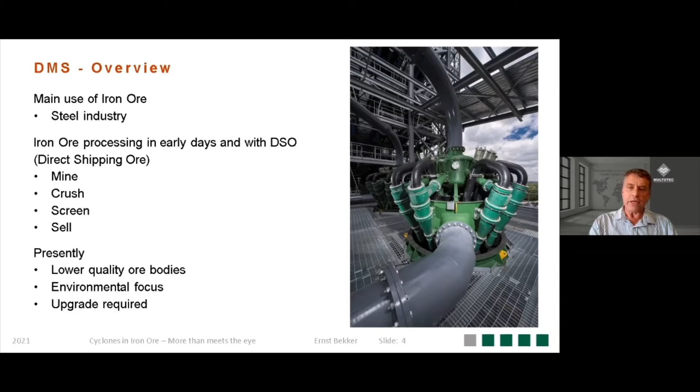So the reason for the processing is to provide obviously a higher Fe content in the feedstock to the steel mills and reduce the impurities like silica, alumina, sulfur and phosphorus. That also results in the reduction in carbon footprint and the emissions, and there's a very strong focus these days coming to the foreground on this specific topic of reducing the carbon footprint.

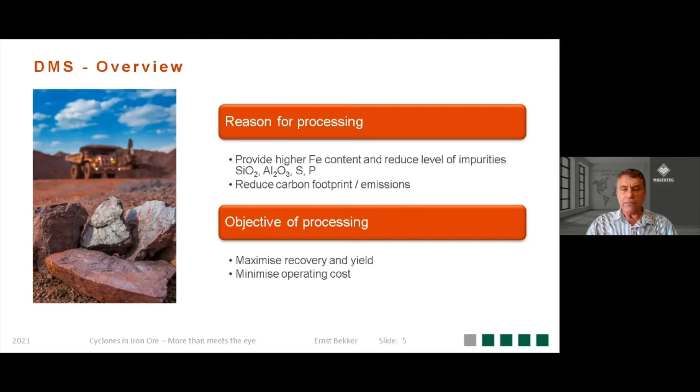So processing of iron ore is seen to become more and more relevant in the near future. The objective of the processing: maximize recovery and yield, like in any process, and minimize then the operating cost.

In this example, I divided it mainly into a DMS and a hydrocyclone environment, but hematite and magnetite are the two predominant ore bodies that is being focused on over the world. With hematite, coarse and medium sections are normally treated via dense media separation or jigging. So hematite is your dense media separation activity, magnetite the milling and classification activity.

The fines and the slimes on the hematite are normally treated via spirals, teeter bed separators, wet high intensity magnetic separators, flotation. And then on magnetite milling, hydrocyclones, low intensity magnetic separators and flotation. So I'll look at the hematite environment and the magnetite environment in this presentation.

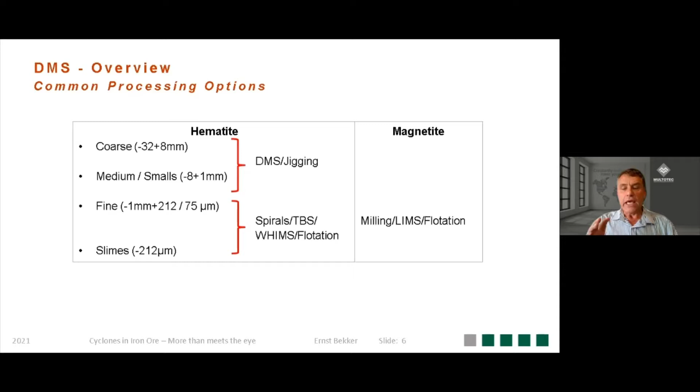So for those who may not be familiar with dense media separation, what is it? When you start looking at the ore body, there's some properties that you need to determine and see which one can be exploited most economically. And with hematite, density is the property that can be exploited.

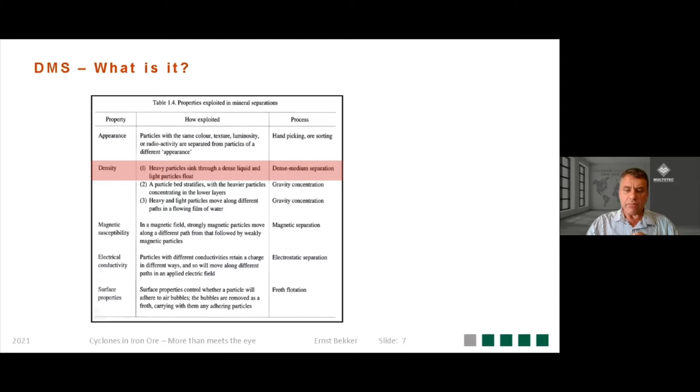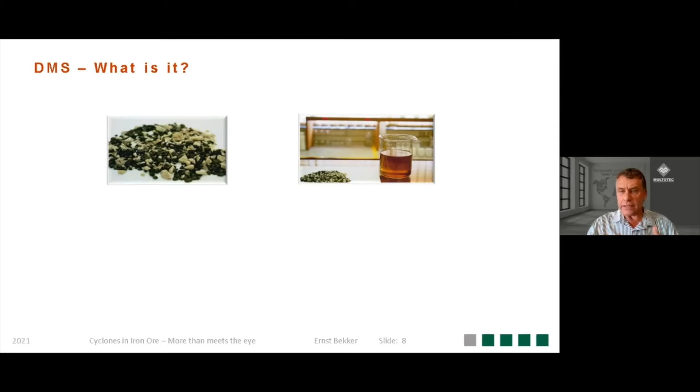So when you've got a mixture of ore coming from underground, it consists of valuables and non-valuables. And you need to separate those valuables from non-valuables. And one way of doing that is to introduce it into a liquid that's got intermediate density between the floats and the sinks. Introduce it into the liquid and leave it over time, and you get then a separation where the light material will float and the heavy material will sink. And this liquid density can then obviously be altered to decide how much of the material needs to float and how much needs to sink.

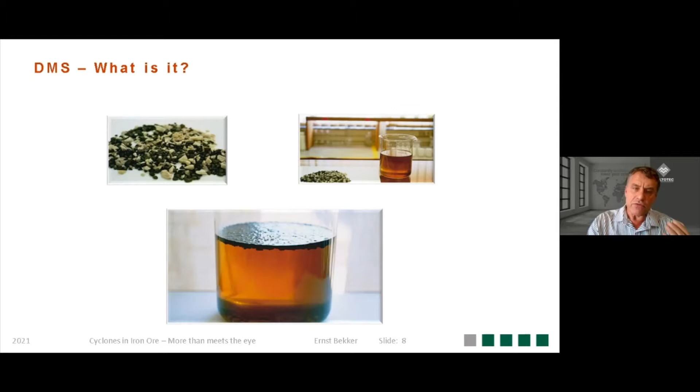But the picture just shown to you is that's on a laboratory scale. When you go into industrial scale, the plant is a bit more complicated. So you've got your feed preparation section, you've got your separation section, and then your media reticulation system.

And that media reticulation system is important because that liquid that was shown in the previous slide in actual operations is ferrosilicon, and it's very expensive and you cannot really afford to lose that. So you must recover it as efficiently as possible.

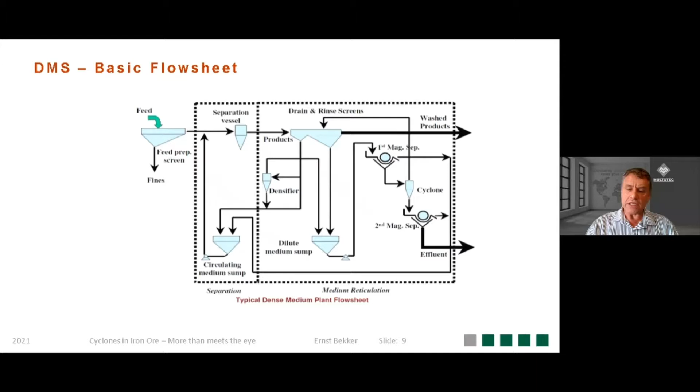So when we start with dense media, looking at the dense media separation, we start off with cyclone selection. This cyclone selection, and in this presentation, this will be the only slide on cyclone selection. We do training sessions where we go into more detail, but this would be summarizing it.

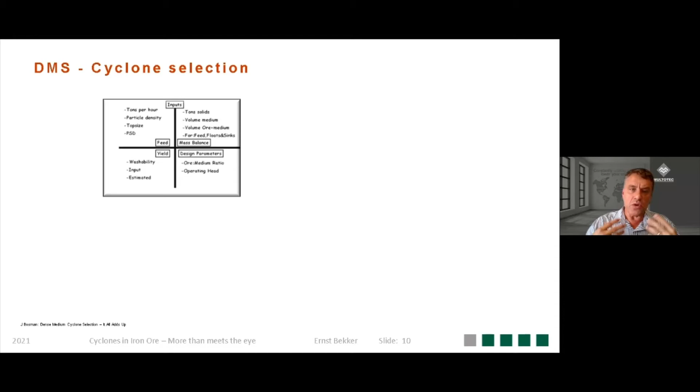You've got your input values. You've got your process values that you need to process. You look at the yield from the ore body. Look at the mass balance and design parameters. You also need to focus on the constraints: top size, breakaway size, number of cyclones, the spigot requirement.

You then decide on what cyclone diameter to select, looking at the cyclone capacity, the spigot capacity, and finally do your selection, looking at the material of construction. We do have a range of material constructions, and you need to then adjust to the circumstances or to the requirement and decide what is going to be the best selection for the client. This is, in a nutshell, what dense media cyclone selection entails.

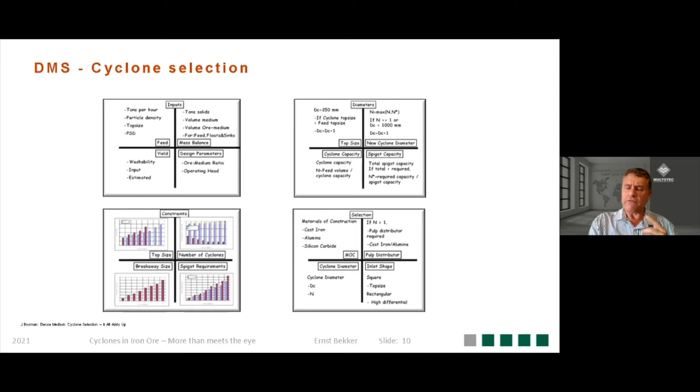But if you've done your job correctly, if there's enough information, if the information was accurate, then nothing should really go wrong. The unit should perform adequately. However, sometimes there are other activities or other factors just to keep in consideration.

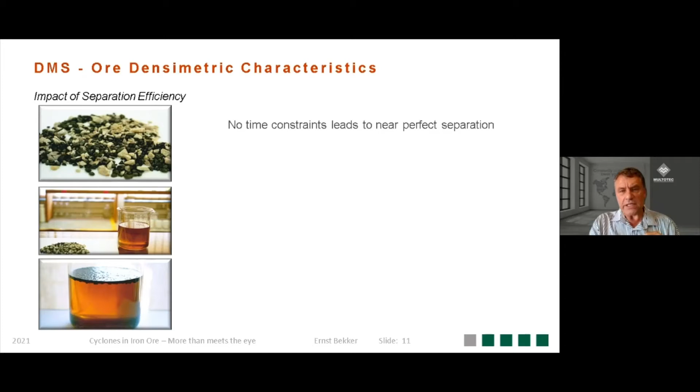The example on the laboratory scale, where you introduce the material into the liquid, indicated, if you look at the bottom picture, a very clean separation. But the reason it's a clean separation is because there's no time constraints, and it leads to near perfect separation. So in this graph, you've got on the x-axis the densities, and on the y-axis the fractional percentage of material.

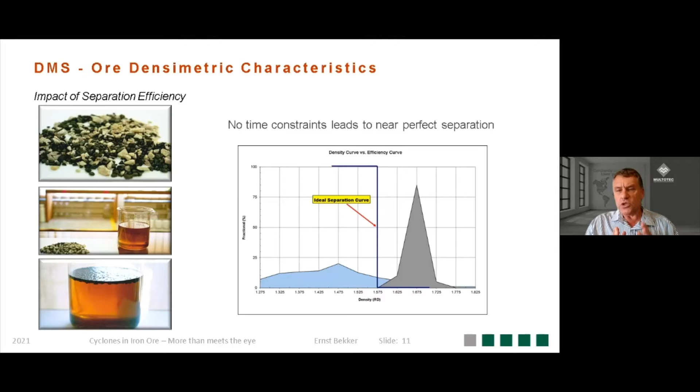And the blue line indicates the perfect separation. So with enough time, you can separate in between two types, splitting between a light fraction and a heavy fraction at a given density.

But when you process material through a dense media cyclone, then you've got time constraints, and there are other factors as well that can reduce the separation efficiency, and I'll touch on that a bit later.

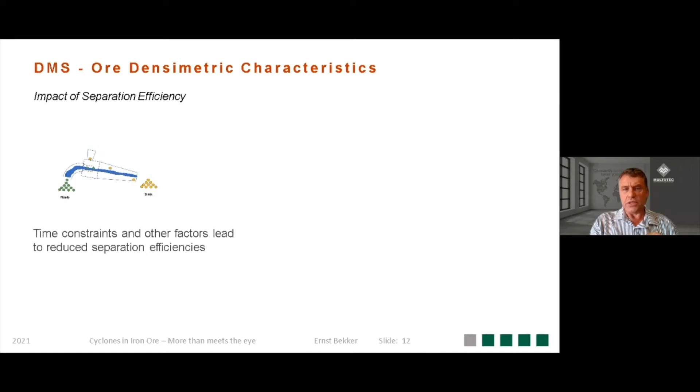Because of these constraints, you don't have a vertical separation line anymore. The lines slope, and because of that slope, you now start to get areas depicted in green and yellow, where material has got the probability of being misplaced. So it's not separated at optimum efficiency. As we reduce the efficiency of separation and operation, these shaded areas increase, and more material has now got the probability of being misplaced.

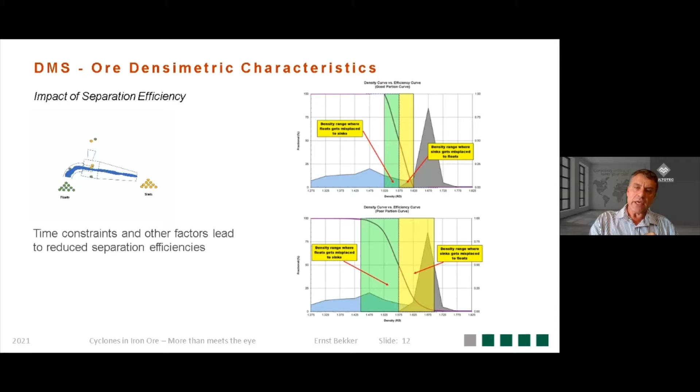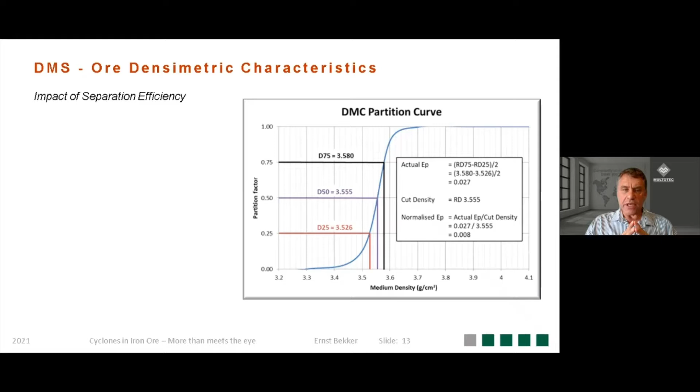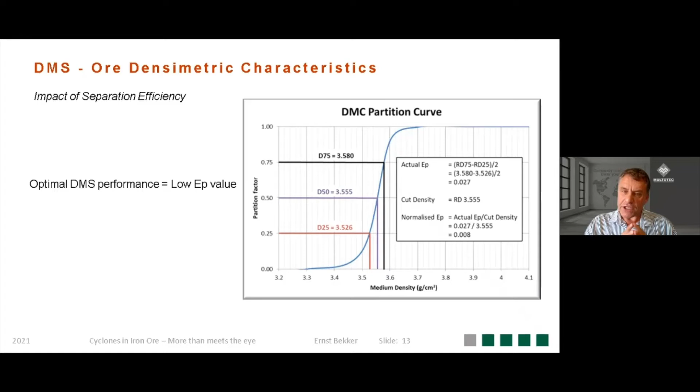So the partition curve gives an indication of how efficient your separation is. The partition factor, if you battle to understand it, is like a probability factor - what is the probability of a material of a certain density reporting to the sinks fraction in this example? The efficiency of separation is determined via the actual EP value, calculated at the top right-hand side, and that is the slope. The smaller the EP value, the more efficient the separation. So optimal DMS performance is associated with a low EP value, indicating good separation efficiency. We see that in the handbooks as well.

So what is the impact of separation efficiency on an ore body? This is an example where a client asked me to evaluate 2 different types of ore bodies. It's the same mining company, but it had 2 distinct characteristics - one with a low near density characteristic, and the other a high near density characteristic.

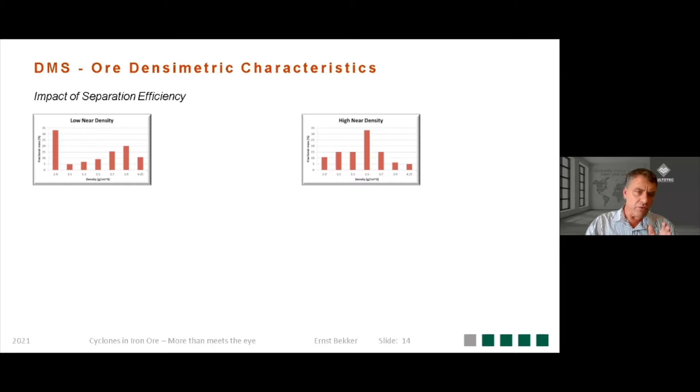Now, near density material is the amount of material present around the cut density of the cyclone. So if the cyclone is cutting at a density of 3.5, all the material between 3.4 and 3.6 would be classified as near density material. Low near density material is normally an easy separation process. High near density material is a more difficult separation process.

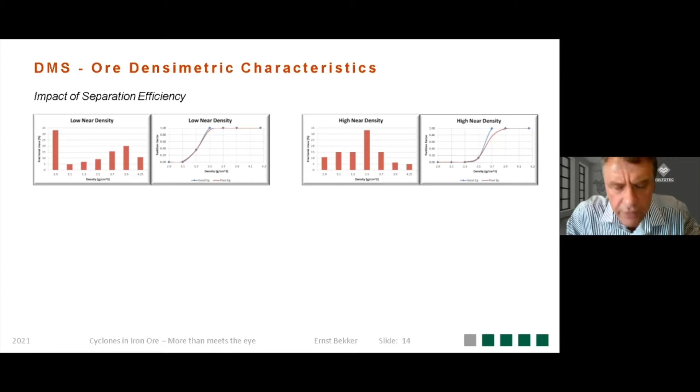So the client asked that I evaluate 2 different efficiencies on this material. The blue line is the good EP value, the red line is the poorer EP value. On the right-hand graph, the reason the red line moves further to the right-hand side is, in this example, the product quality of 65% iron was maintained.

Superimposing the 2 graphs on top of each other, you can see that with the poor efficiency of separation on the low near density material, that's about the amount of material that can get exposed to possible misplacement or poor separation. On the high near density material, there's much more material that can get misplaced or separated less efficiently.

Compare that when you had a good separation value on both examples. You can see in the high near density environment, if you had good separation efficiency, the impact would have been quite significant in reducing the amount of material with the probability of being misplaced. This points to a specific situation: if you are processing material that is easy to separate, over time you can get away with a poorer separation efficiency. But if you maintain that type of operation when treating more difficult to separate material, you're going to have a substantial impact on your bottom line.

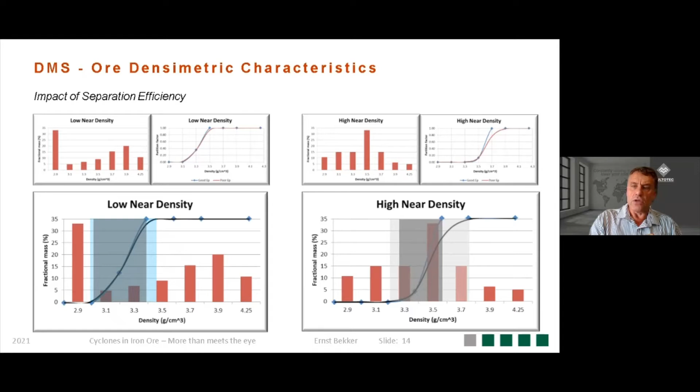So the evaluation went further with this client - the low near and high near density scenarios, looking at a low EP and a high EP value. Just a point, this high EP value of 0.067, these are not theoretical values.

I will show you later in the presentation how easy it is to get to these values, and often exceed them as well. Treating 1,000 tons an hour at 65% Fe was the aim.

You will see that the yields are different because it's different ore bodies, but the difference between treating low near density material versus high near density material, and the difference in poor and good separation efficiency, can be seen on the last line. On low near density ore bodies, poor separation does have an economic impact, but not as significant as with high near density environments.

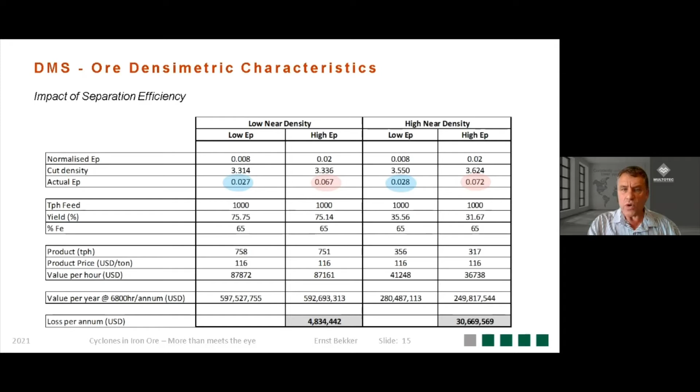So there's one area which can become a problem, even though the cyclone has been selected correctly. Coming back to this graph, the comment was made that optimal DMS performance is associated with a low EP value. That's what the handbook says, and everyone agrees with that. That is true. What is not always clear is that you also need to be at the correct cut density. Cut density is this 50% point on the curve, the density where a particle has a probability of 50% of going either to overflow or underflow. That's what we refer to as the cut density.

So some viewers will probably tell me, how is that possible? Because you've got a SCADA system and a process density control system built into the system. So how on earth would you not operate at the correct cut density?

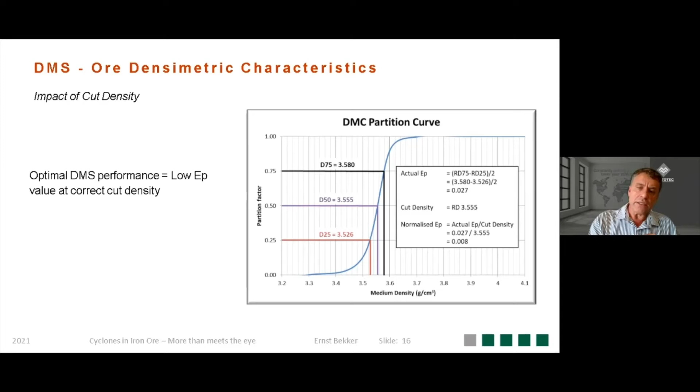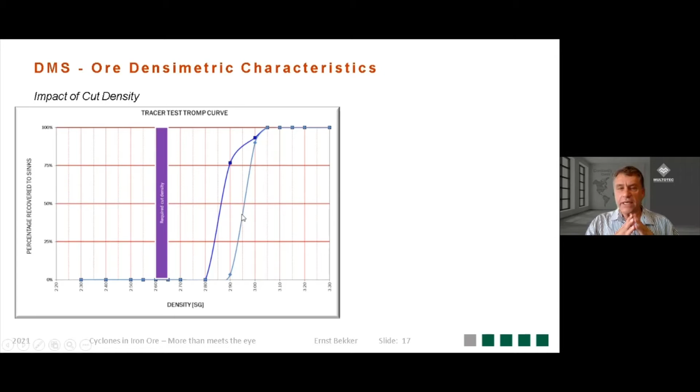Here's an example of a different plant. The shaded area is where the SCADA set point is, and the two other lines are where the tracer tests indicated the cut densities actually were.

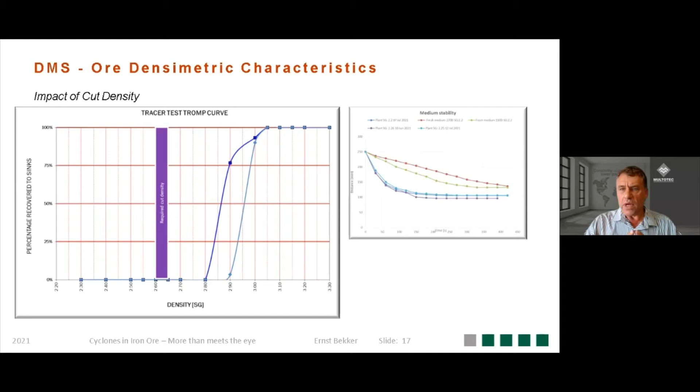The problem here, and the client did a thorough investigation, is the media characteristics. This is a settling test, just over time. The red and green lines are new ferrosilicon, and then the media that's in process shows a different settling rate. So the media is unstable. Now the question is, where do you need to go and look for the problem? But that is how a cut density can change.

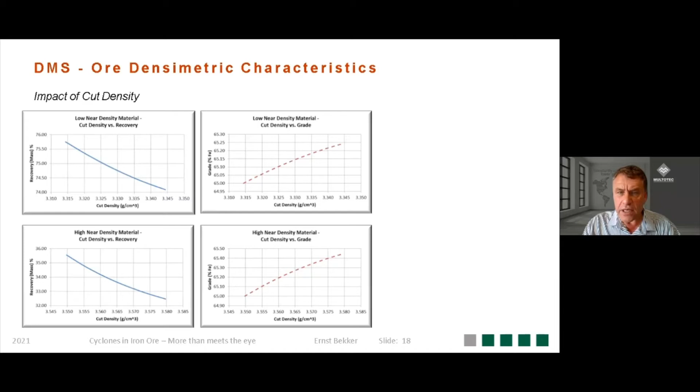On the low and high near density environments, the yield dropped about just over 2% on the low near density environment, and about 3% on the high near density environment. That is the change in quality. On the low near density environment, a 0.25% iron content change, and on the high near density environment, a 0.4% change. On the economic side, the impact on your low near density material is about 13 million US dollars, and on the high near density material about 25 million.

So if you speak to clients, they might say, hang on, why is this a big deal? Because if the product quality is changing, we will be aware of that, and we will take counter action to make sure we counter for this deviation.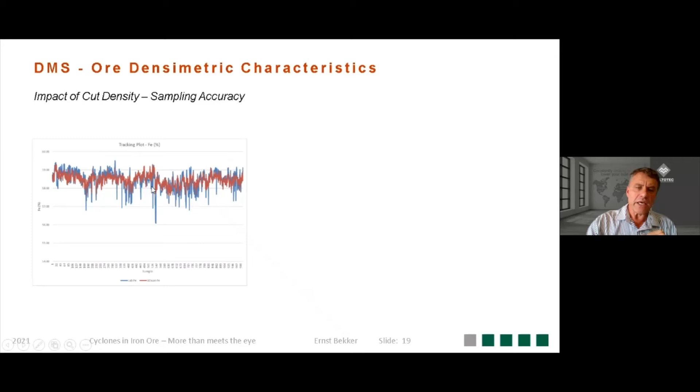This is a comparison between a laboratory and an online analyzer. I was looking for different data to illustrate the point, but the factor to keep in mind with sampling is variance, Willem alluded to that as well. To use this as an example, the same sample was analyzed by two different methods, and look at the difference in quality results being reported. The purpose of showing this slide is not to compare these two methods. What I want to illustrate is that there's a variance in the results you are measuring.

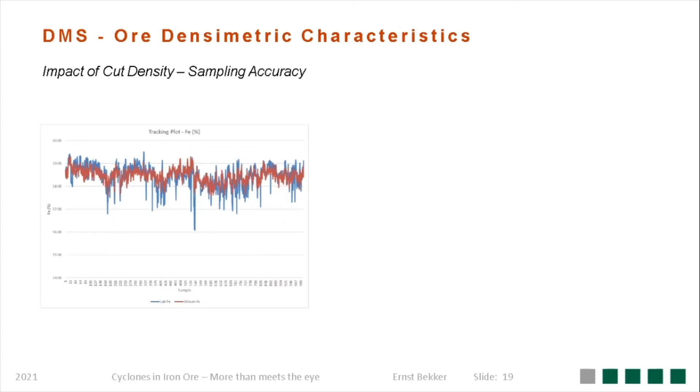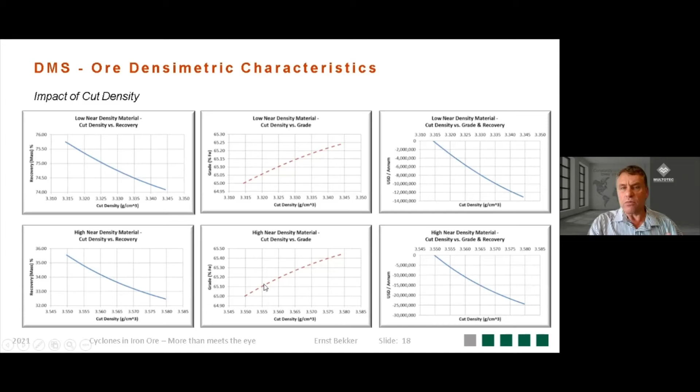And that variance can sometimes mean you're not able to measure a 0.03 density quality variation. Coming back to this slide, on the near density environment, there was a 0.03 difference in density. Can your system measure that? If not, then you've got a problem, and you may be losing money without knowing it.

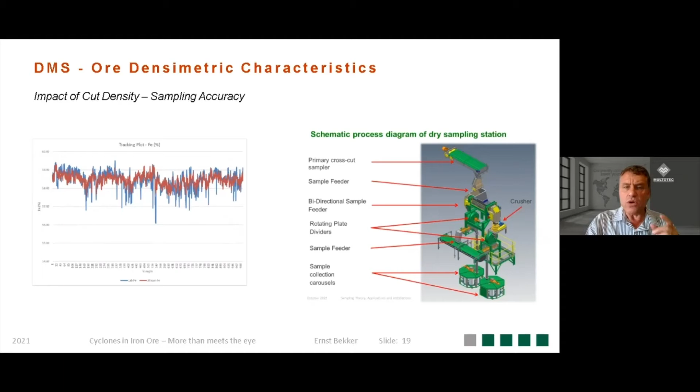Having proper sampling systems is a starting point, Willem has spoken about that as well. In some operations, the sampling is not always done correctly. 80% of your sampling error comes from the actual sampling activity. Just keep that in mind, because that will help you minimize losing money.

Another factor is the media. In this example, this is a comparison between an operating density of 3.4 going up to a density of 4.

Brent mentioned earlier about ultra-high dense media separation becoming more popular in the iron ore industry. This triangle shows a relationship between the percentage of slimes, the amount of minus 45 micron, and the sphericity of the media. The operating window at lower operating densities is fairly large, but as you go to higher operating density, you need to be spot on with your media.

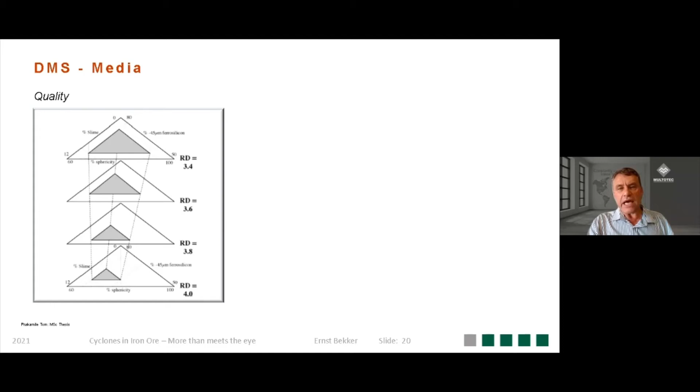The sphericity is a function of the supplier of the ferrosilicon, but the slimes and the ferrosilicon is a function of the process. Your feed preparation system needs to be up to spec. That's where the screening panels, knowing the screens, comes in, and then you've got the minus 45 micron on the other side. What's happening with you? How do you recover your media?

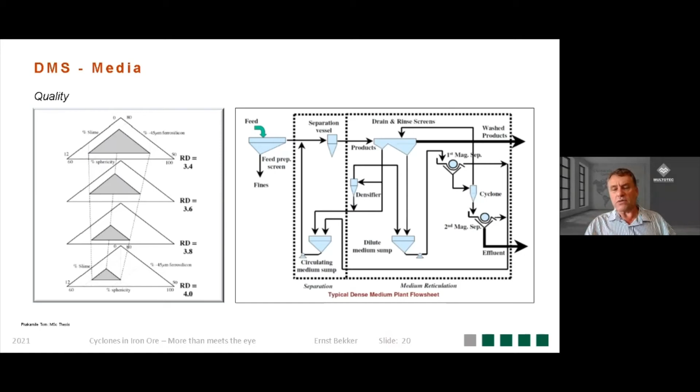How efficient is your system operating? So there are other factors - again, the cyclone has been selected, but it's going to get affected if the rest of the process is not optimal, and suppliers need to know that.

On DMS factors, the cut point shift and the EP value we started to talk about - there's now the factors of media composition, which is creating media stability, which is a function of media rheology. You've got your equipment geometry - that's where we selected the cyclone. Feed characteristics play a role, and then operating conditions.

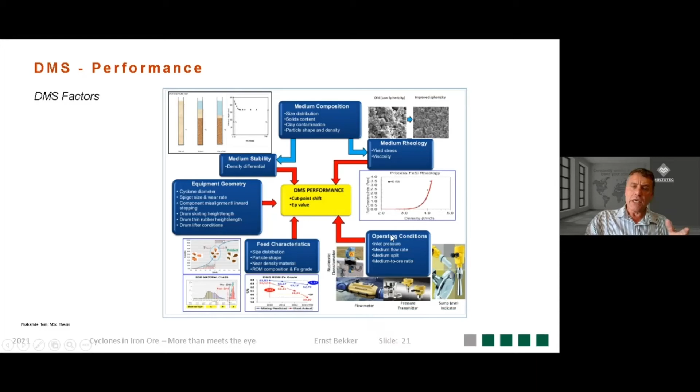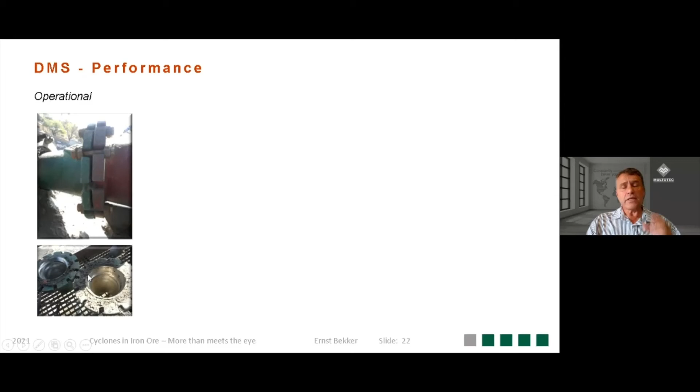So you've selected the cyclone. Now we're looking at the operating conditions to the cyclone. But then there's a third issue there, operational - items that could get misaligned, creating inward steps, creating turbulence. That turbulence is creating misplaced material. So equipment not operating at the correct conditions.

These are two spigot discharges from cyclones on the same distributor, coming from the same pump. Something is wrong here, but that operation continued.

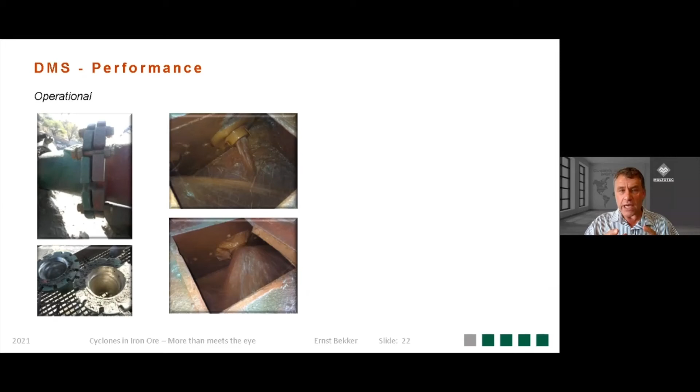On the densification circuit, the pipe densifier - the client battled to maintain density. Only later, when we inspected the system, did we realize that whoever did the installation had an oversight on one of the pipes, and he lost money during that period of time. Coming back to the comment I made earlier, to see a 0.067 EP is not difficult.

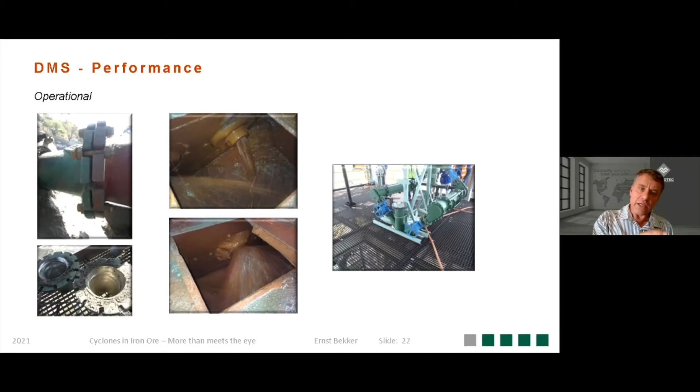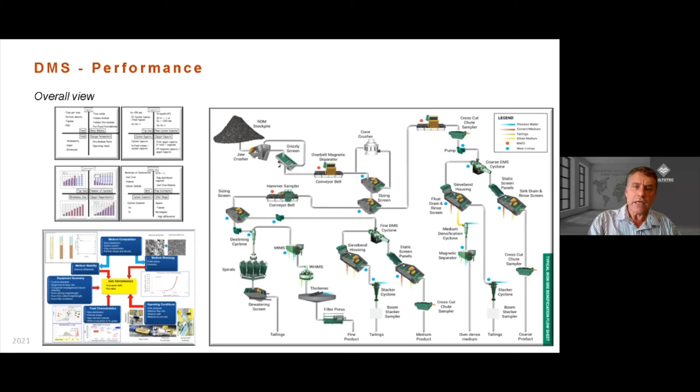So these types of conditions can create a problem in your process, although the cyclone has been selected correctly. So you've got your cyclone selection activity - that's where you get all your information. You need to look at the feed conditions to the cyclone, but then you also need to be able to look at the overall process. If you optimize all three areas, that is where you are performing optimally.

The primary milling circuit has got screw classifiers. The secondary and tertiary circuits have got mill cyclones, closed circuit mill cyclones. The cyclone overflow will go into a magnetic separator stage, and the magnetic separator concentrate will move on to the next milling stage, and so forth.

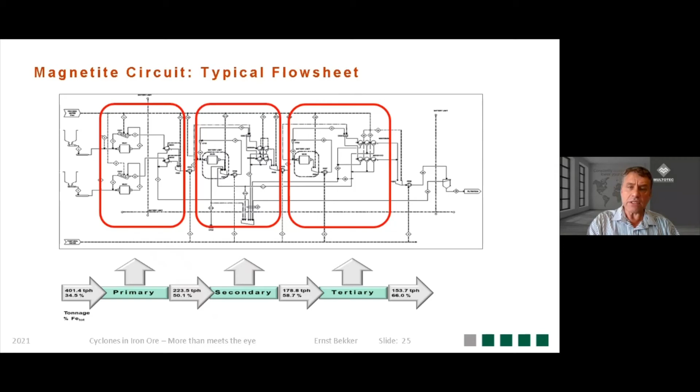The requirement was to treat just over 400 tons an hour and take up the feed grade from 34.5% to 66%. That was the brief that was given to us. We worked with the engineering house on this project, and after some time, these were the results that were produced.

That started off when we began to look at the third stage magnetic separator section. What you've got now is the amount of minus 71 micron going to the magnetic separator, compared to the final product being produced by the magnetic separator. You could see that it does seem the finer the material becomes, the better the iron ore content should be, which makes sense - it's better liberation. But it does seem that something is like a wall that sits on this side here.

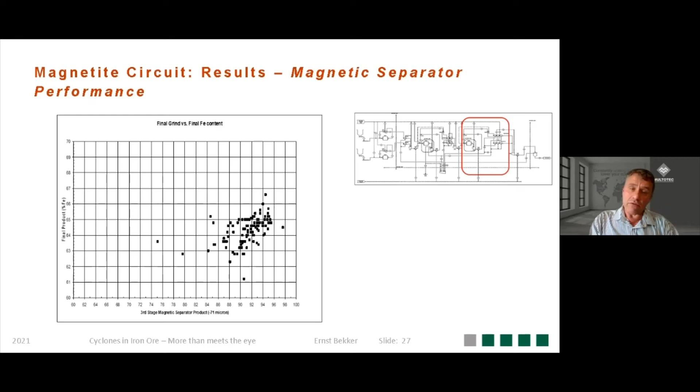The focus became that the cyclone overflow needs to have a finer fraction, and there was a lot of focus on the cyclone. We started to look and say, okay, one of the things with hydrocyclones is you need to add water to improve the separation efficiency, to make the cut point finer.

So this indicated that somewhere there was an energy limitation problem as well. We went back and looked again at the data around the mill, and it indicated that you're not really going to see more than 96% minus 71 micron coming from the mill circuit. So then you're not going to see that in the cyclone overflow either, because the cyclone cannot produce a finer overflow than the mill itself.

Following this, we went back to the data and looked at the old circuit compared to the new circuit. The old circuit is the white area, yellow is the new circuit. You've got your first section here, your primary stage. Then you've got your secondary cyclones, the tertiary cyclones, and then your secondary magseps and tertiary magseps. That's just to give you an idea of how this information is laid out.

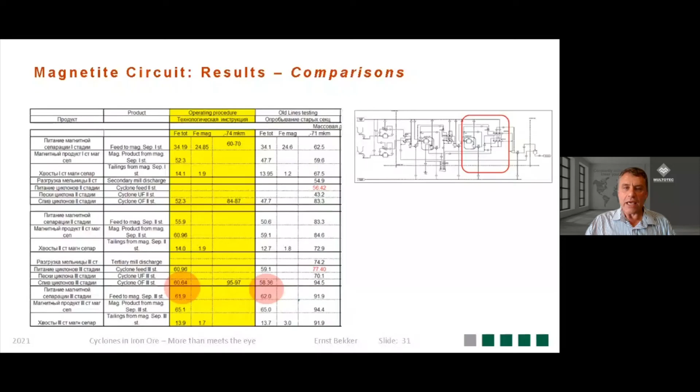Also, the other question was, why, when the minus 71 micron starts to be liberated a bit more, is the grade not reacting? When you looked at the concentrate from the magnetic separator, you realize that there's entrapment. So you can have fine material, but the silica is not released. You can grind finer, but there's silica present that can't get out.

Looking then at the process, we eventually realized that this process was part of the old design circuit, and that has been omitted from the new design. These are called deslimers, and that is taking the silica out of the circuit.

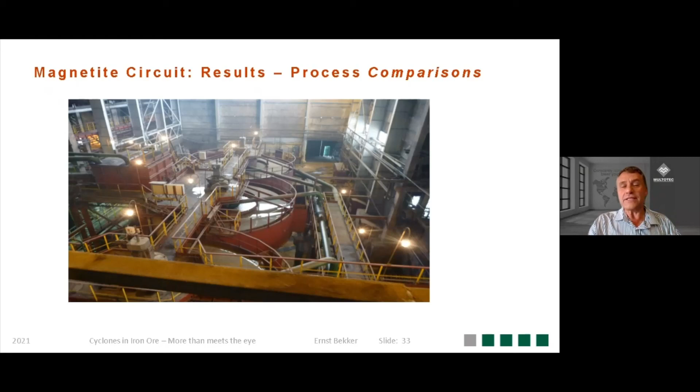So there are some lessons to be learned. The focus moved from the cyclone as the culprit to later realizing there was a different change in the process that resulted in these challenges. The problem was eventually resolved, but again, this illustrates that the cyclone is not always the culprit.

So in conclusion: a 610 diameter cyclone, treating 134 tons an hour, 60% yield, $116 per ton - it's now a bit higher, but this is what you can expect to generate in revenue per hour, just above $9,000. Per annum, about $66 million, or just over R1 billion. That's from a single cyclone, ladies and gentlemen.

A 610 diameter cyclone is expected to last, under the right conditions, for about a year. So that's what you can get. What's interesting is the payback of the cyclone is about an hour - sometimes just less than an hour.

When we deal with clients, it's amazing sometimes how the price of the cyclone becomes the focus point, and not what it generates. For sure you can get cheaper equipment - that's almost a given. But look at the amount of money being generated per annum.

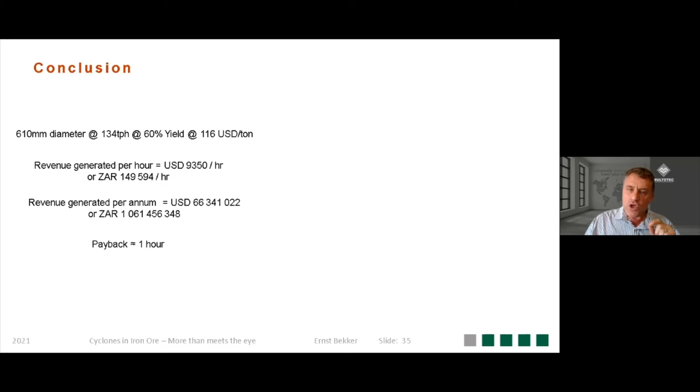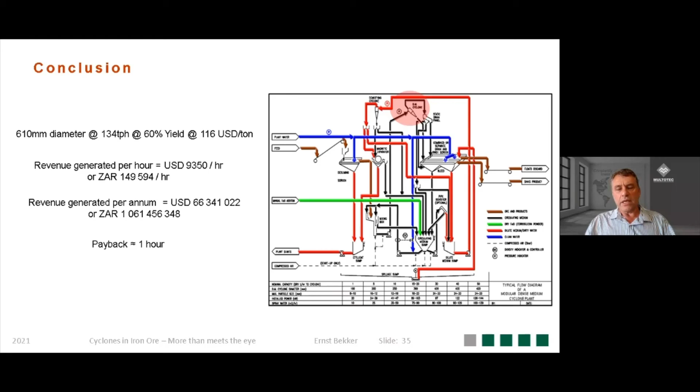Each one of those flow category lines can impact the cyclone that sits in the middle of the process. And once something goes wrong, you lose big money very quickly. The same goes for the milling circuit as well. The cyclone sits in the middle of the process, so it gets influenced, but it also influences other equipment.

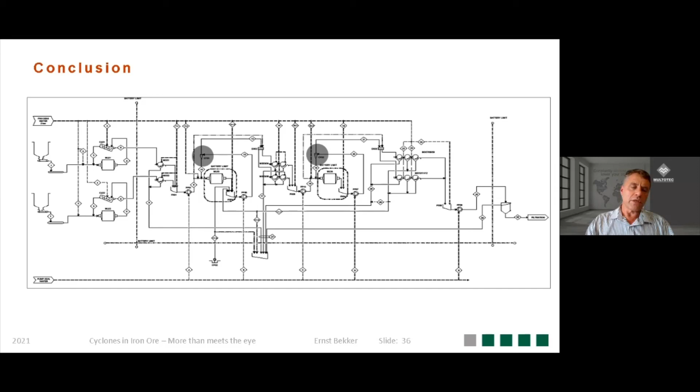We need to be able to assist our clients. So when a client has a problem with a cyclone, everyone can help him focus on that and try to solve the problem. But experienced cyclone suppliers are able to show clients that sometimes you need to focus somewhere else. Thank you.